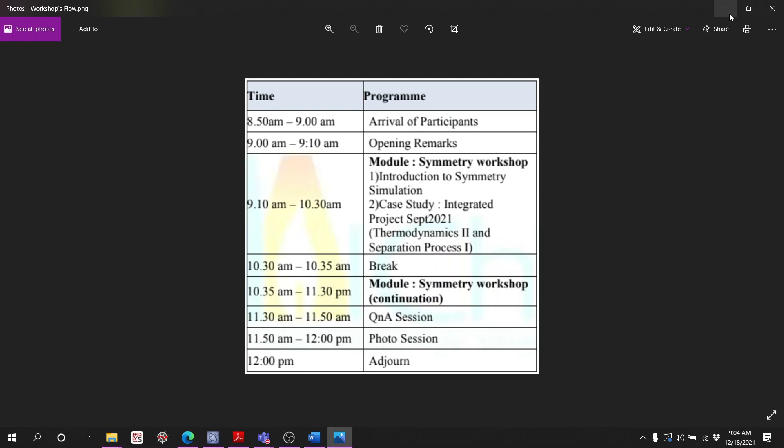But the main question in this business is what to do, right? So what do you want to do, and then how to do that. And then where we get the information to do what we want to do. So that's basically what is more important, rather than only following blindly what I'm doing. So I need to have your

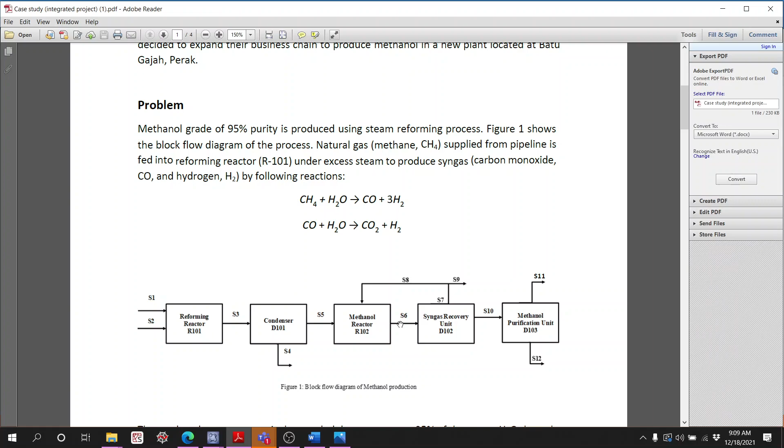And then the produced syngas is cooled down. So we have the syngas produced over here. In this reactor, running these two reactions, it will then produce syngas, and it will be cooled down to remove 95% of the excess water.

So this is the excess water. We need to remove 95% of the excess water, so there's about 5% of water coming out. If we assume 100% water coming in, 95% will be dropped to remove 95% of the excess, because 100% here is the excess water.

So we will do this step by step.

My first question to you: in running this reaction, you need to know the operating conditions. So what are the operating conditions of this reactor? What is the pressure and temperature?

Anybody? Like I said, if you don't have the answer, then we cannot move forward. Okay, now find the answer, you can just Google that or open your book, whatever.

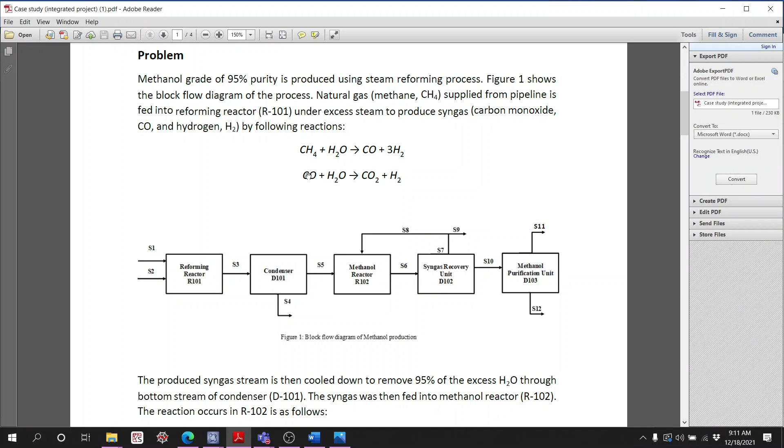Let's put the components first. So we need to have methane, water, CO, CO2, hydrogen. So it's these four, and then we need to have methanol, because in the end methanol is then going to be produced here.

I'll put this aside to my other screen. We need to go to the compounds first, and then here you can just type it. C1 is then methane. So when you type C1, this list shows everything that has to do with C1. This is then C10. So this is then methane.

So you can either click this, and it's added there, or you could also do, for example, water, and enter once, it will be selected, and enter the second time, you get the component in. And then you could also do multiple components all together.

So we have methane, water, and now CO, carbon monoxide, and then you do a semicolon, so this CO is captured already, and then hydrogen, and another semicolon. Now you have captured CO and hydrogen, and then we need to have CO2, and then we need methanol. So now you have captured four, and press enter, and enter once more.

Right, and then in all of these other reactions, we have CO, hydrogen, methanol, water, it's there. So all of these components are in our system already: methane, water, CO, hydrogen, CO2, methanol.

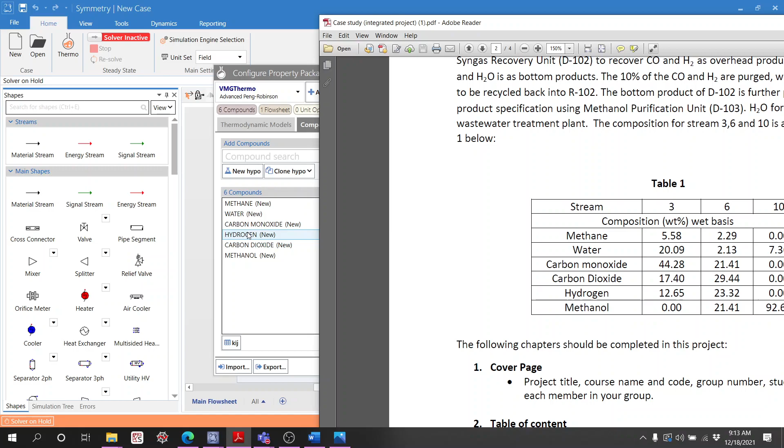So you could also rearrange it, put hydrogen below CO2. How we do that is we go by sort, click sort, and we need to drop this down, move down, and have it the same as in this stream table here, for example, and then apply sort order. Okay, now, can you follow?

Can you follow? Yes or no? Again, like I said, yeah, I need to have...

Okay, now thermodynamic models. We could use various different thermodynamic models. For example, we can use one model for this block, another model for that block, and another for that block. You can have as many thermodynamic models as you want, because in specific unit operations there is only one thermodynamic model that fits the best. So you could do that, or we can just lump them all together like normal people do.

They just use one thermodynamic model. Hopefully they will just use one thermodynamic model and capture the entire vapor liquid equilibrium or the entire thermodynamic properties, because all of these are working at different operating pressure and temperature.

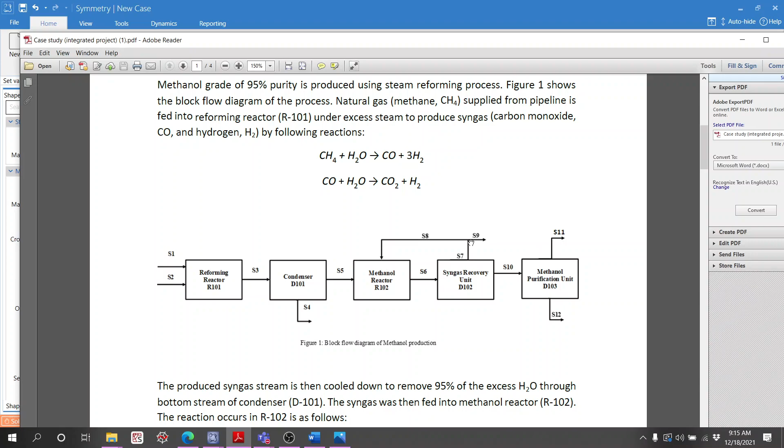So in this case, we could use simple, or let's just try this and see, because sometimes we don't have a license for all of these thermodynamic models. I don't know if you have the license, because your license is different than mine. So let's see, if I click done and there is no error, that means I can use this. But if there is an error, that means I cannot use this. I click done, see, I don't receive any error, that means I can use that thermodynamic model.

So now, when you click that done, do you see any problem? Do you see any error? And can you follow? Hello?

You can just type in, yeah, if you are too shy, you can just type in. You can just put like a thumbs up or error, error.

So that means you don't have the thermodynamic model, so we have to change it to a different one. Go to thermodynamic model and then use the ones that for sure they have, or you have it, which is this one.

So this advanced Peng Robinson is not the original Peng Robinson. VMG already adjusted this so that it fits for natural gas, refinery, and petrochemical. So you can click that and then click done. One more thing, and I hope there is no error, but if there is, let me know.

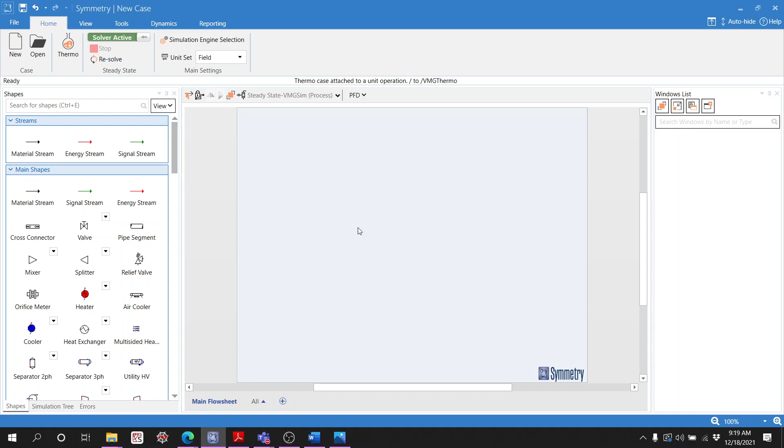Okay, so now we are here. I will show you. We have specified the thermodynamic model, the advanced Peng-Robinson, and then we have specified the six components. Up until here, this is the only thing that you need to know. There are many things behind this, but we will leave it to the advanced user later on.

Now we need to create streams. We need to create two streams: one is methane, the other one is water. So what we need to do is...

This symmetry works with Visio, and I think you're all familiar with Visio. So it's just like a drag and drop, simple like HYSYS as well, because the very people who developed HYSYS back in the 80s are the same people who became the advisor of developing this symmetry. So if you know HYSYS already, you know how to use symmetry. But I don't know how well you know either HYSYS or symmetry.

Nonetheless, it's just like a drag and drop, I can just click and then drag and drop, and then double click on this. So for example, instead of S1, I just use the methane stream. So you can have like a methane feed. You can just rename it to whatever you want. So, methane feed.

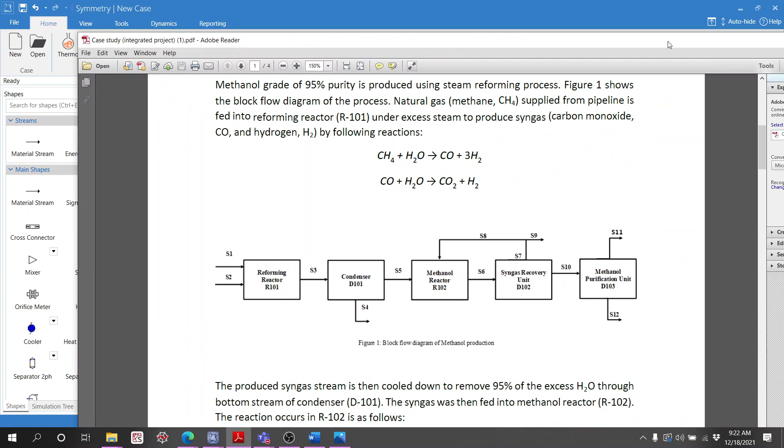Before we go to that, it says here natural gas is supplied from pipeline, and then we have steam as well. And then these two, when they come to this reforming reactor, the conditions of these two streams have to already be at the conditions required by the reforming reactor. I repeat, these two streams, when they get into this reforming reactor, their conditions have to be at the same conditions required by the reforming reactor.

And hence, if it says it is supplied by a pipeline, that means it's like a typical ambient temperature, and I don't know what the pressure is, could be like 50, 60 bar or something. And then the steam as well, if it's like a high pressure steam, like 40 bars or so, 300 degrees C or something. And then when it gets to this reforming reactor, which you should know, and which you will tell me now, we need to do something with this such that these two conditions meet the reforming reactor's conditions. Okay, now...

Write down in the chat what the operating conditions of this steam reforming are. So now we assume this methane feed is coming from a pipeline, right? That means it's ambient temperature, I don't know, 25, 30 degrees C, and then pressure, let's make it like, I don't know, 50 bars or something.

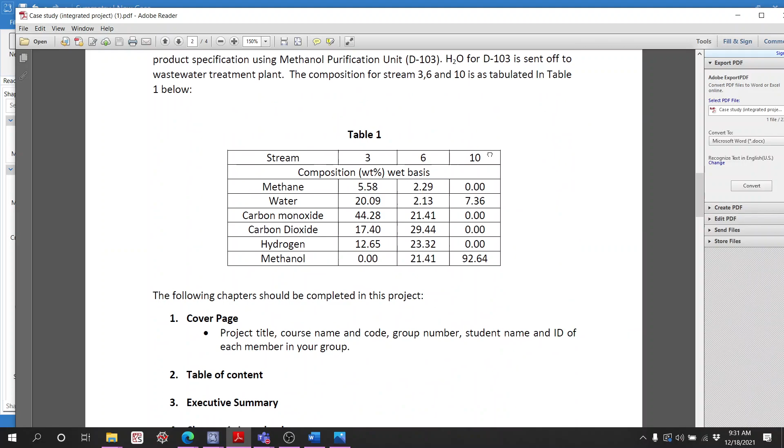So in this case, we can just say 50 bar, and since we don't know, what is that document again? We don't know how much is coming in, and it doesn't say how much methanol you need to produce. Okay, so it's something for you to figure out. In this case, maybe 1 ton an hour, so 1,000 kilogram per hour. So when everything is filled in, you can see this remark as solved. That means it can calculate the molar flow rate, volumetric flow rate, and so on.

We can click this drop down. So you have energy, enthalpy, entropy. It's all relative. It has a baseline temperature for enthalpy and entropy behind this Symmetry. Molecular mass 16, density at this temperature and pressure, compressibility, and so on. So it is there. It's green, solved, and you can see that this is light blue. In my version of Symmetry, light blue is vapor.

And now we make another one, steam. Do you have any questions so far? Can you follow? And then what are the operating conditions of the reformer? Nobody knows. If nobody knows, then I don't know what to say.

So now the steam. We can just say steam feed or feed steam. You can put any name as long as you can recall it later on. So what do we say on this steam? Because I don't know what is needed, we'll just assume something. So 300 degrees C. And in this case I can play around, because this is steam. So we put one in water, and then we'll see. Now, if you say that it's 1 atm,

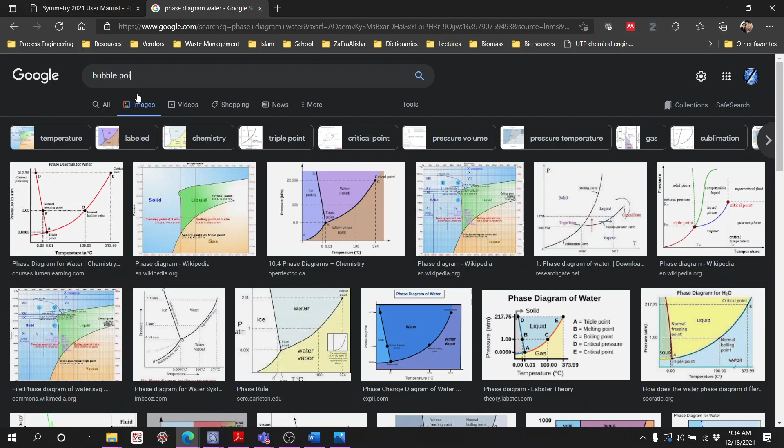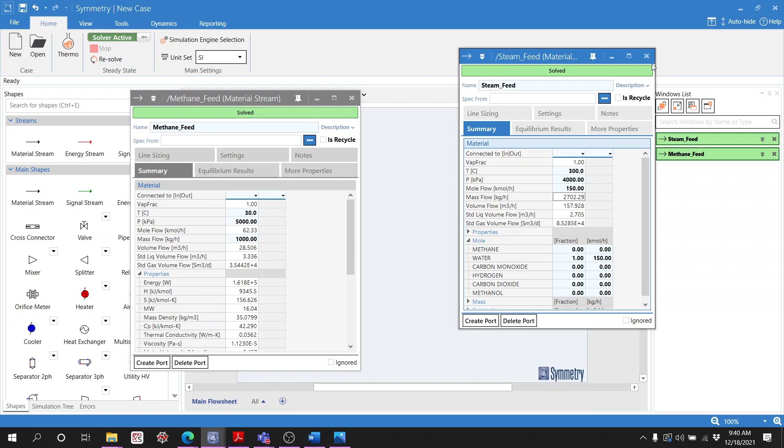So that means this is then the 62. That means I can safely put here like 120, for example, or 150. Let's put 150 kilomole an hour. So I have that 150 kilomole an hour. It's 2,700 kilogram an hour. Okay. Now we can just save this. Make sure you always save this. Save it by any name you like. I save it as methanol from steam methane reforming, so that I know what's in it.

Is there any question? It's 40 minutes. I've been talking for 40 minutes already, so I will stop here. Are there any questions? Hello, hello. Can you follow? Is it too fast? How do I know whether I am too fast or too slow, whether you understand it or not, if you don't make any noise? No questions. Okay, very good. You have to be more interactive. The kids nowadays can express themselves better in TikTok, in Twitter, in Instagram or whatnot, and you have to be able to translate those expressions of yourself into the classroom, into a workplace environment. Because if you stay quiet, people do whatever they like on you.

Okay, now if you don't have any questions, now I'm questioning you. What are the operating conditions of the reactor? Because this feed needs to be conditioned in such a way that it can fulfill the reactor conditions. So what are the operating conditions of that reformer? Come on, I give you 2 minutes. What is the pressure and temperature of that reformer?

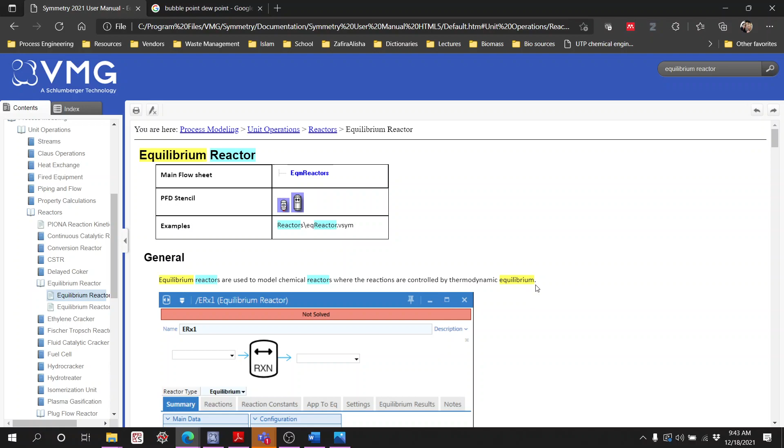Equilibrium reactor. You can Google equilibrium reactor: controlled by thermodynamic equilibrium. And then there's also this Gibbs reactor. In this reactor, we don't specify the reactions, we just specify the components that are possibly coming out of the reactor. It then uses Gibbs energy minimization calculations to calculate the product. This reformer typically works at higher temperature and lower pressure, so it's very close to ideal, and it gets to equilibrium already.

Okay. Hey, where are the reformer operating conditions? Come on. If you don't have it, you can just sit here until 12 o'clock. Because I don't know that information and you don't know that information, so what do we do? What are the operating conditions of the reactor? If you don't know, we cannot move forward. Hello. Steam methane reformer. Very easy. What happens with you? 20 bar, 250, 360 degrees C. So how do you get that?

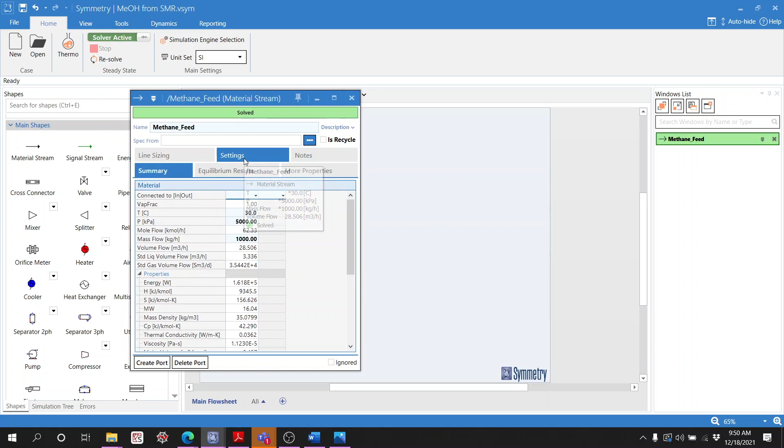So in Symmetry you can also find it here, a port. I think port is somewhere here. Symmetry fundamentals. Port. Yeah, somewhere here. You can just search for this later. Fundamental concept, port. So you can read this later on. But I'll just quickly tell you. Okay. Where's that thingy?

If you click drop down here, methane dot out. That means this stream, methane dot out, is here at the end, because it does the calculations and it will then send the results of the calculations to this output, and this part is the inlet. This is the inlet, and this is the output. So that's why this unit has the inlet over here, and then the output. So the input of the valve has to be connected to the output of something else.

So in this case, methane feed. So it's there. So we have in and out. In is over here, out is over there. So in is then over here.

So we just need to reduce the pressure, right? So you could do it many ways. Number one, because it's 50 to 20, that means you have to reduce by 30 bar. So you could use 30 over here, or you can just simply put 20 there, and then let Symmetry calculate that for you.

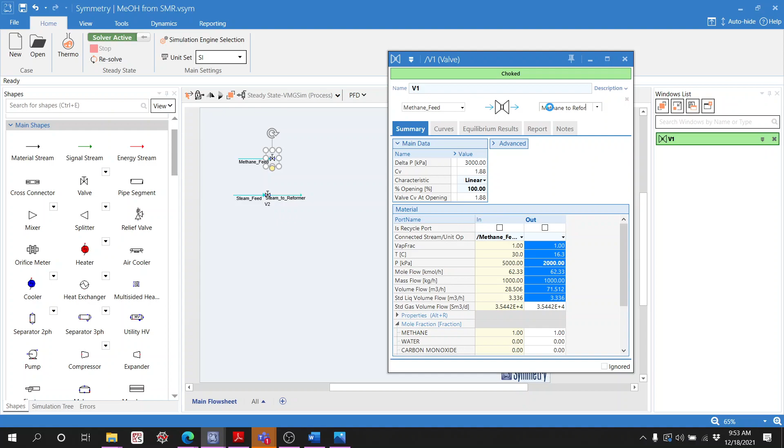For example, the same goes here. The conditions are there, but the name is not there, because this unit is not connected to any stream. So you can either drag and drop and rename it, and that's another hassle. So we can just easily write this down. Methane to reformer. Okay. Any questions so far?

Yeah, because this is like Visio. So you can zoom in with control and scroll up, zoom out with control and scroll down, and then shift left, shift right, control up, control down. Something like that. So it's easy.

You can also, if I want to extend this, just like Visio, use control. You can see control. See? Control, and then you go to the right, and then you can just drag, so then you have a bigger flowsheet.

Valve and relief valve. A relief valve is also a valve, but it is named relief valve because it has only one function basically. This relief valve is only to relieve what's in it. So for example, I'll show you the easiest way to learn, so that you can do this on your own later on if you don't know. Again, googling skill is the best and most important skill nowadays.

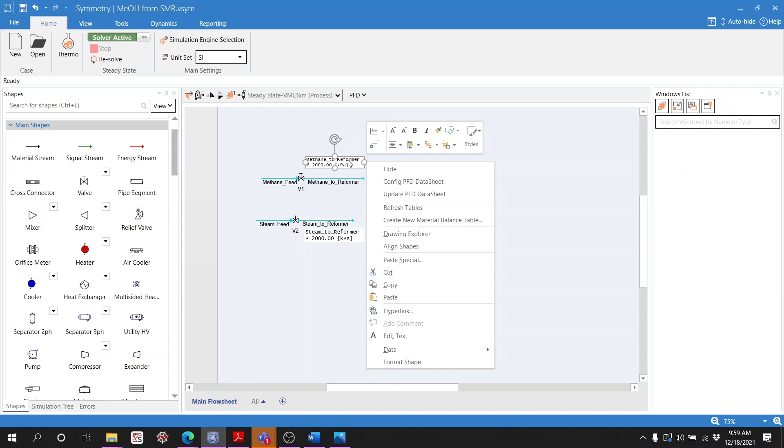Okay, so because someone wants to have a bar, I want to have 20 bar, why are you showing me 2000 kilopascal? So just right click here, right click, and then config PFD datasheet. Right click and then config, and then hopefully it will appear. It'll take some time in my case, but I don't know why.

So in the meantime, while waiting, you can just change the unit to bar, for example, bar. Okay, and then the format you can just say I don't want to have decimals, I want zero decimals. And then to apply, that means if you click update, only this one will be updated, but if you apply it, this will be applied as well. So apply to all material streams. So you can see 20 bar, 20 bar.

And then we mix it and then we heat it, it's easier than heating them all separately. Mix it, so mixer, and you can also do it this way, and you can also do it that way to make it easy. So when you connect it, you can see that this is already dark, so it means it is solved already.

Solved already, and then 20 bar, 20 bar, 20 bar. So lowest P outlet is the default calculation mode. So if 20, 20 coming in, outlet should be 20. If it is 40, 20, that means the outlet should be 20. It accommodates the lowest pressure in the inlet, because otherwise it won't flow.

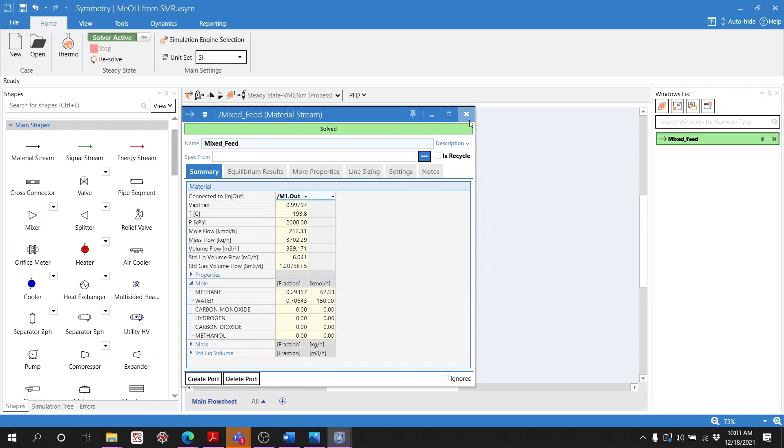And then you can just drop down and feed to the reactor, to the reformer, feed to reformer.

Now, in this heat exchanger or heater, whatever you want to call it, the goal of this unit is to increase the temperature. The goal of this unit is to reduce the pressure, and the goal of this unit is to increase the temperature. The goal of this unit is to mix the streams. So since the goal of this unit is to increase the temperature, we need to know what the required temperature is. What is the outlet temperature?

You can do this in many ways. You can add a delta temperature, so this plus a number plus this number, you will get that one. Or you can just type in your number here or there. In this case, if we type in 900 degrees C, that means the delta T is then 700 degrees C. And then it doesn't converge.

It's not solved automatically because it still needs the pressure balance. The energy balance is there, so we have the energy. The mass flow rate is the same. But the volumetric flow rate is not there because we don't know what the pressure is.

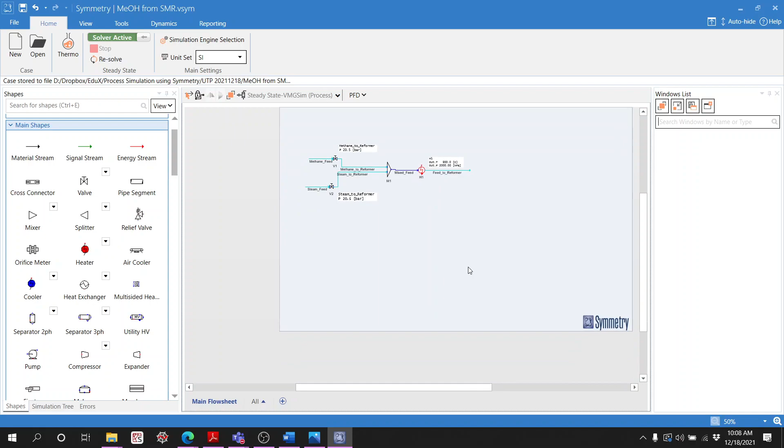Later, sorry. How to share? Do you have this flow sheet? Yes, I have this flow sheet.

Okay, I'm trying to share my screen first. You can just share your screen. Sir, can you see my screen now? Yeah, very good, one minute. It disappears, it's gone. Now cannot, no, it's gone. It's black, I don't know about the others. Oh, like this, and now, one minute, now it's good. Okay, so what's the question?

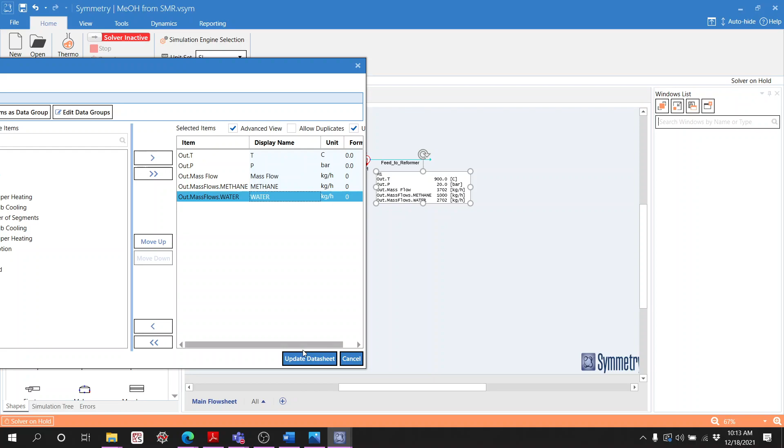I think you can also rename this display name—so by default it takes out this, but if you don't want to see this out stuff, why do I want to see that? I don't want to see that, for example, yeah, methane and water, and then update, and you get this, and then save—don't forget to save always.

Okay, thank you sir. You're welcome. Very good, yeah, very good. So we need people like you more—you need to ask questions, sir.

So you cannot see my screen already right now? I can see your screen. Yeah, I saw your screen. You still saw my screen. No, this is my screen. Oh okay, yeah, okay, because I didn't stop sharing just now. I'm just wondering whether someone needs to stop—no, you don't need to stop. If someone shares his or her screen, the previous one will be overlapped, or replaced, closed.

Okay, now feed to reformer. So we know that we have fulfilled the required conditions for temperature and pressure, and now we go to the reactor. Since we don't know, we're not using any of these fancy reactors, we simply use a conversion reactor. Or we could—I think we will just try both, equilibrium and conversion, so we'll see what the difference is.

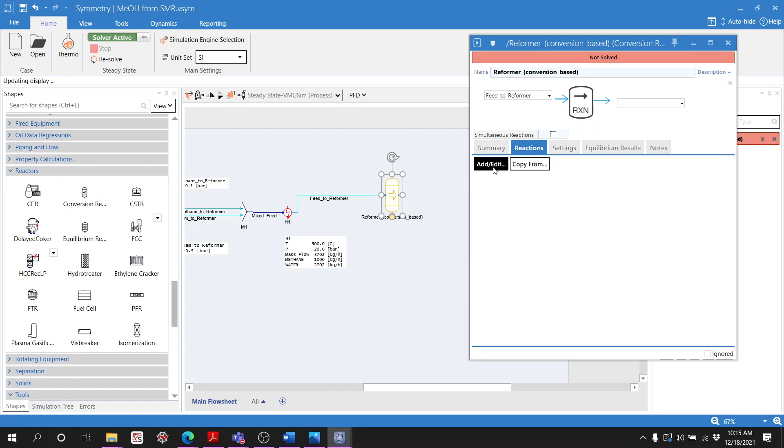And then we need to specify the reactions because this is conversion based. So specify the reactions. Go to reactions, and then here we can click add or edit. So you can name it, reaction one, for example, and then the base component. So you can see methane is reacting with water. In this case, I think it is more appropriate to use methane as a base component. That means we will do the calculation based on methane, not on water.

And then in the second reaction, we will do the calculations based on the CO, not on water. This water will be left hanging, so it will be calculated accordingly. So methane as a base component for this first reaction, and then CO will be the base component for the second reaction. So we can see base component is methane.

Now the reaction, I think you know already if you know how to use it. So this is going to be -1, this is -1, this is 1, this is +3: -1, -1, +1, +3 from the stoichiometry. So methane is -1, so I just type in -1. Water is -1 as well, and then carbon monoxide is 1. You can also see while I'm typing here the balance in moles. This has to be 0, otherwise something is wrong.

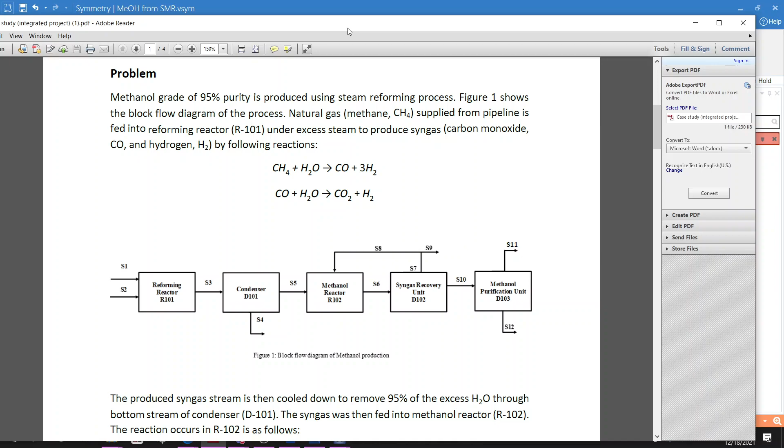And then the CO, because we need to have more CO, we could say maybe 10% or 20% CO is being reacted over here. So it's something that you need to find in the literature: what is the typical steam methane reforming outlet here? So just put a number, like 20% or something, and then click OK. Okay, and then the summary.

In this case, we need to know the pressure. We have defined the pressure. There is a 50 kilopascal pressure drop. Because this is conversion based, we do whatever we like here. We need to declare this reactor. Is this an isothermal reactor or adiabatic reactor? If it's isothermal, that means the temperature stays constant throughout the reactor, or it's adiabatic, that means there is no energy coming in and out of the system.

Again, I repeat, we need to define or declare whether this reactor is operating in an adiabatic manner, that means no energy coming in or out of the reactor, or is this reactor behaving in an isothermal way, that means the temperature is kept constant throughout the reactor. So how to know this?

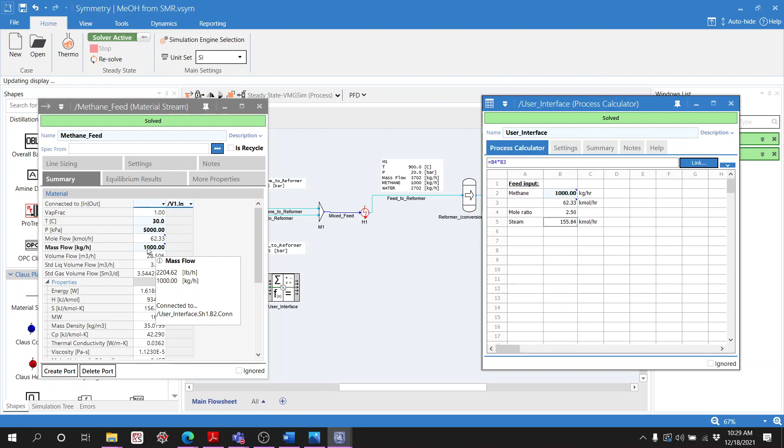So bold is something that you key in. This is our input, like this one. But if this is not bold, like 62 and 62, it's something that is being calculated. Bold is input, not bold is calculated. In this case, this is also our input, but only in the process calculator, so it doesn't have bold. If you want to make it consistent, you can just click Control B and it's bold, so that you know later on, next week or tomorrow.

And then the steam. We use this steam as an input, 150. But in our case, if you put the mole ratio of 2.5, it has to be 155. So we can right click here, copy connections, highlight this and then paste connections there. So you have 155. This 155 is no longer an input in this window, but it is an input somewhere here, which is controlled by this guy. Okay.

By doing so, you see that we have two connections here: one connection to this methane, and another to this steam. That's why we have two green lines. But later on, it will get messy, so I typically hide PFD connections, so there's no green line. I put this aside, because we need to know this up until here before we move on to this user interface. Do you have any questions?

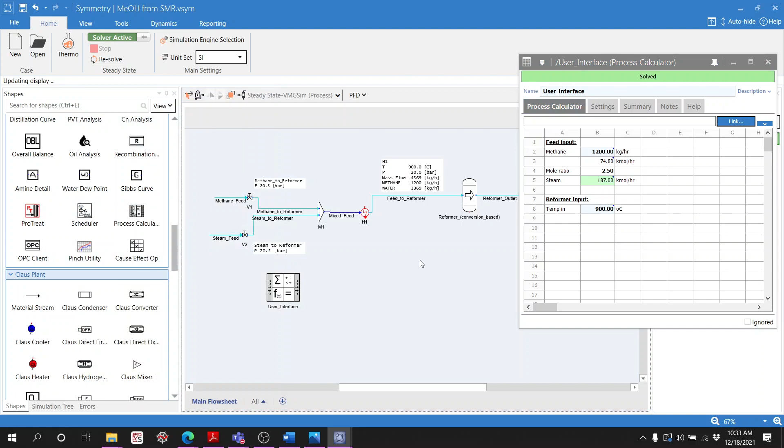So in this case, reformer input is obviously the temperature into the reformer, which is this here. Temperature into the reformer, copy connections, and then there, and then in the reformer itself we have the reformer conversion base.

Reaction 1, reaction 2, you know, 1 and 2. This is 0 and 1, because it's based on Python. This is in fractions, from 0 to 1, but we know this is the 99.9%. So we copy connections, put it there. This is also copy connections, and then put it there. So that's it. Save.

And then you get up until here. These are the important inputs that we can play around with. Okay. And then, as I promised, we'll try another type of reactor, the equilibrium reactor. See what happens. So this equilibrium reactor will use the same stream, same input basically.

So how to do that? This is the power of this simulator. This can be easily done if you click on this, open this stream. We can just easily click create port. That means we create port from here. So what do you want to copy? The inlet, the outlet, or any other properties.

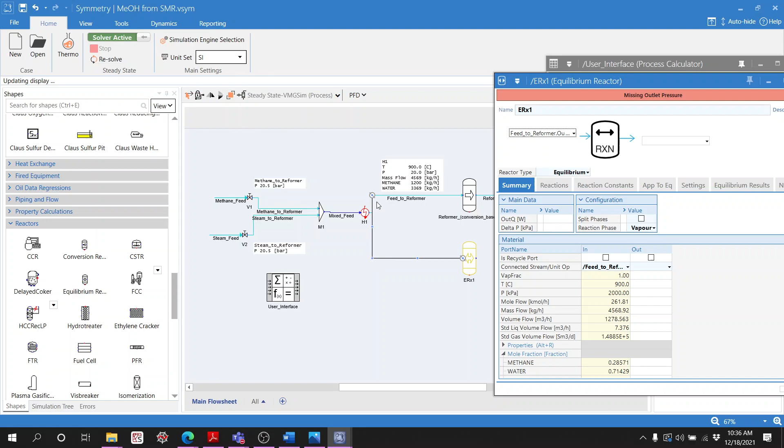So we can just keep it open, and then we double click, because there is an out-1 stream coming from here. We just don't see it. So the way to do that is double click here, and then enter here, and just drop down. You can see out feed to reformer, which is this, and then out-1, which is this guy, coming from the stream into the equilibrium reactor.

Again, delta P we keep at 50, and then temperature is also... okay, now it's a bit trickier, just to make things the same. So this cell, we are going to use the same temperature here, constant, the same temperature there, constant. But this cell, it is connected to this temperature. Sorry, it's not connected to that temperature. It's not connected anywhere else. Basically, there's an input temperature.

So temperature of conversions, so this is then this guy. Copy. Oh, I cannot copy this. See, I cannot copy this. So the only way to get that here, I can just use this in the reformer outlet. Instead of keying the temperature here, I can just key the same temperature there, at the outlet. So I will just delete this and then put the temperature here. So this guy is taken from that, and that one we can copy easily.

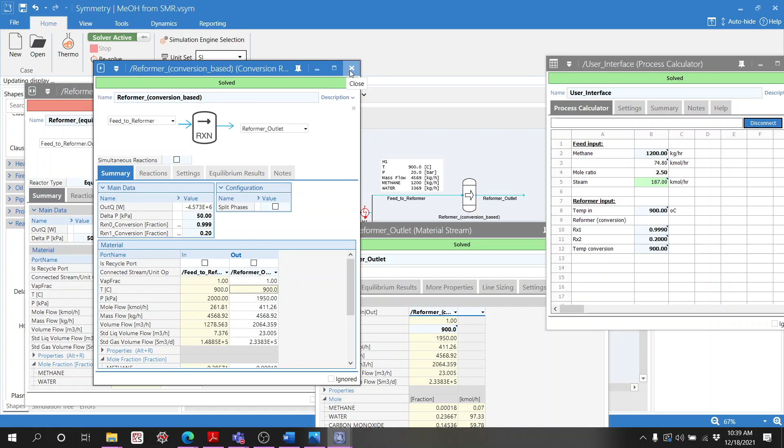So now, since the temperature of conversion is over here, it is connected to there. So I need to make a temp reformer equilibrium. Temperature equilibrium. So in this case, we are going to use the same temperature. Let's use this. Enter. And then again, I don't think we can just copy paste this. Copy. We cannot paste this, because there's something there.

So what we could do is then reformer outlet equilibrium. So instead we use the same trick. We copy this, copy connections. We put it there. Paste connections. Okay. So both of these reactors are using the same temperature. And then now the reactions, we can just edit or copy from. Let's see if we can copy from. This one is the only reactor. Select all, and then okay.

So I have these two reactors, equilibrium, and then this one is also a constant. This is something that we need to have, which apparently we don't have, unfortunately. I forgot that we need to have this. So we need to make a table of temperature and experimental K. Because equilibrium depends on the temperature, we need to have the data on the temperature and the equilibrium itself. If not, it will not know. So in this case, we cannot proceed with this equilibrium.

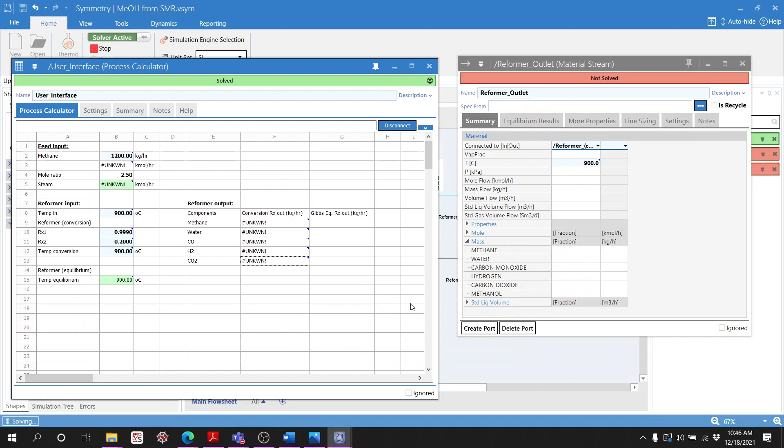Okay. Now the same goes with this guy. Copy methane, and then water, and then CO, and then hydrogen. This is a bit, yeah. So now save. Don't forget to save.

We can see apart from methane, one is then 10 times bigger. Water is about the same. CO is slightly lower. Hydrogen is slightly lower. So all in all, it's not that bad. Yeah, I mean this whole stuff is not that bad. I mean these assumptions that we make in comparison with the Gibbs calculations is not that far off, except for this methane.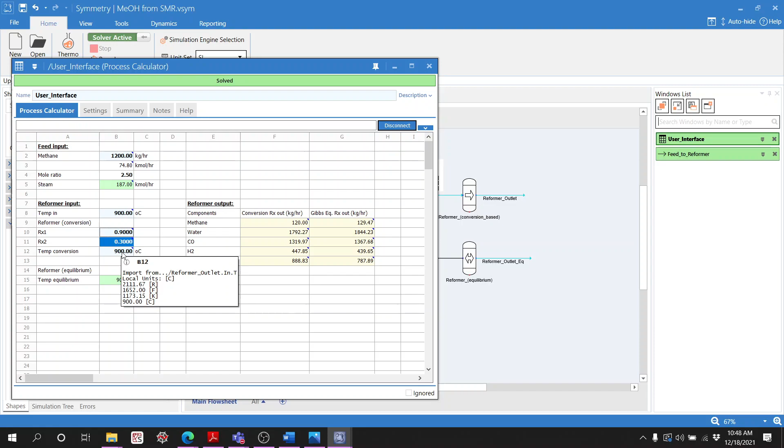Leo, why do you want to control this?

Okay. So now I'm giving you another tool as well, to do this calculation automatically. Because we know the methane is in the first reaction, CO is then the second reaction. So we want to make sure that the difference between this and that is very small. What we just did was trial and error manually. So I want to show you how not to do that manually.

You can just make a square of error. So this is then this minus that and then square. The square of error is then the 89. So I want to minimize this. If this is minimized, this number will be approximately the same. And I want to know the conversion that corresponds to this minimum number. So how to do that?

We use controller. See this controller. Double click. You can play around and apply the same concept in other situations. I want to make sure this becomes 0. So this is our PV, the target variable. It says PV because in dynamic simulation you will use the same controller as well. Right click, copy connections, then right click, paste connections. You get this 89. And the target is 0.

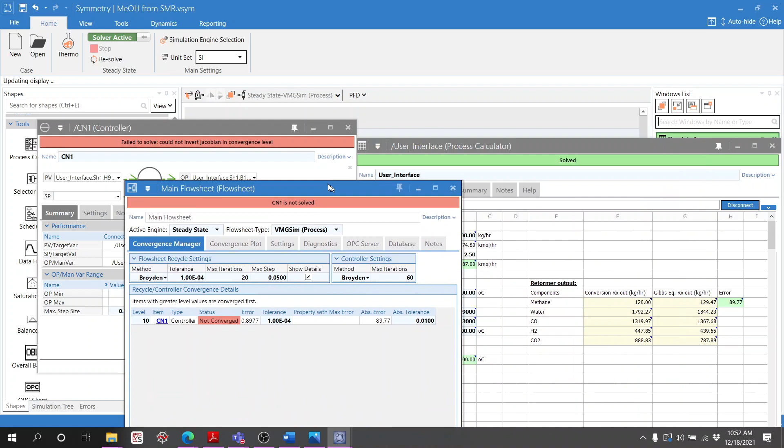Okay, I'll look into this later and update you on why we cannot do so. I think there's something to do with the... I'll let you know once I get this done. But this is basically the way we do this adjustment or controller stuff. I don't know why it doesn't work. This one, I don't know. It typically works.

0.9. Could not invert, yeah, I don't know. I don't understand this message. Anyhow, I'll put this inactive, so we'll skip this. I will let you know later. I'll check into this, what happens.

Nonetheless, we are now here at the outlet of the reformer. So we have done save. What we have done is, see, it's already close to 2 hours, and we are only until here. Okay, we're only until here. Now this stream S3 is the outlet of the reactor, and it will then be condensed to remove 95% of the excess water.

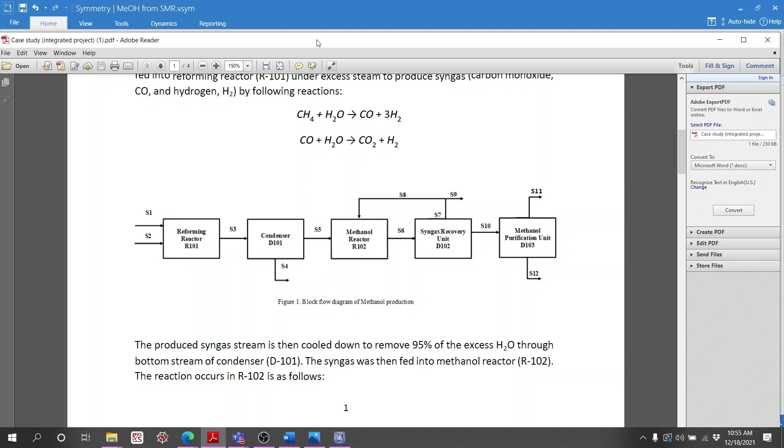This is cooled down, yeah. It's cooled down, not like a scrub or a quench. So it says cooled down here, meaning we just need to reduce the temperature in this case. So we are going to reduce the temperature from 900 to a temperature that can condense 95% of the water from what is coming in.

Mathematically, yeah. To be honest, I don't know how to do this practically. You can then lower this. We typically use a quenching, but in this case no. We can just mathematically reduce this temperature, cool it down, and work on this Gibbs free energy.

Okay, so we have a condenser. This condenser basically has two functions. Number one, reduce the temperature, and the second function is that because you reduce temperature, the water vapor will then have to condense, right? So once it's condensed, we then have to separate that into vapor and liquid. So the first function is to drop the temperature from 900 degrees C to a certain degree C, and after that it will separate the vapor and liquids. So two functions.

So in this case, I repeat, we are going to need two functions. Number one, reduce the temperature, and number two, separate the vapor and liquid. So from that perspective, we need two unit operations. Number one is the cooler, which we need to reduce the temperature.

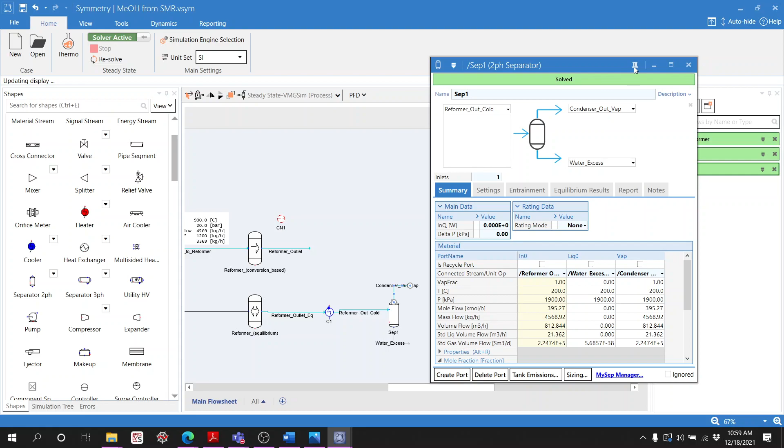And then we see nothing. We can see so liquid is zero, all zero, and everything is still in vapor. And then you can also see the color - this is all gray. Gray means there is no flow. So what is coming in here, everything is still in vapor.

So what we could do is make a calculator. We need to have this 95%, right? Just, I don't know why, but let's for the sake of it take it as it is.

Condenser. Water in - so water in is the one that is coming from the reactor outlet, right? So this water in is then the amount of water at inlet. So that number, copy connection, the outlet of the reformer, and we put it there. Okay, kilogram an hour.

And then 95% in the liquid, right? In the liquid water, it should be 95%, right? 95%. So how much is that 95%? That is then this guy times that guy.

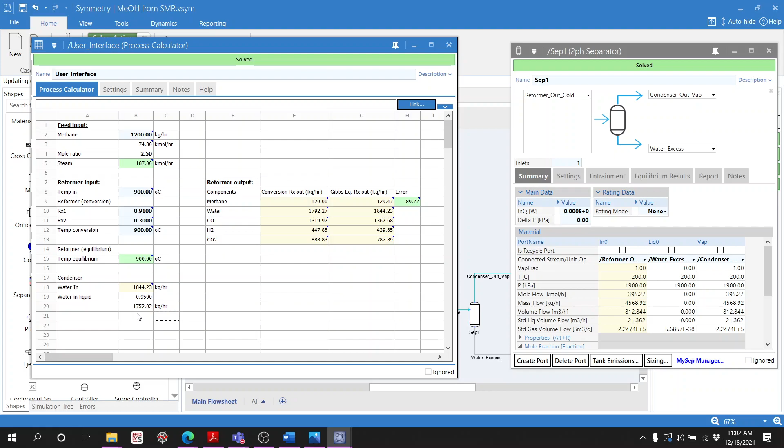Basically in this water excess, right? This has to be in the water excess. It has to be somewhere here. So what we could do is play around with the temperature, reduce it in such a way that this is then the water, the water excess over here.

The water excess over here with that stuff is this stuff, right? This is the target. So this target has to be close to this number, close to this number. Okay, so how to do that?

We use the same controller. So this is what we want. Target: we want to have it 1700.

750. And then what we can control, what we manipulate, is this guy, this temperature out. Okay, step size is, I don't know, 100.

Error, blah blah blah, so it doesn't do anything. It tries to do something, but apparently it doesn't do anything. So if we try it, however we call it, it doesn't do what we want.

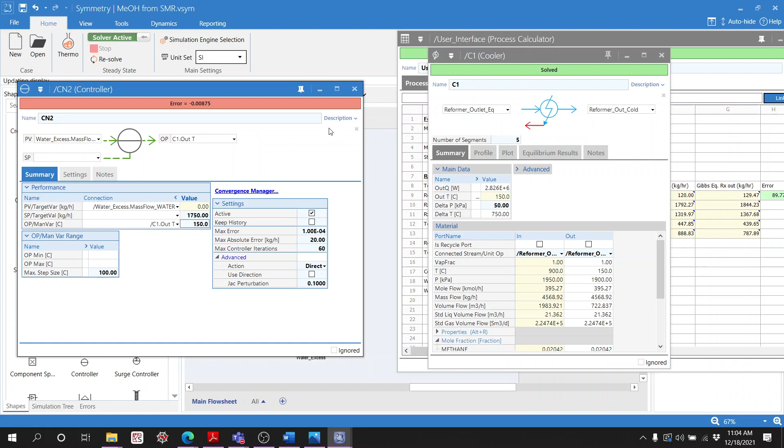That's not necessary. So if we reduce this manually to 150, it doesn't do anything. So what can we do further? Because we don't know what the temperature is, we don't know what this temperature is.

We could use one of the tools, which is the case study. This case study is more like a sensitivity analysis. We can vary the temperature here in such a way that we monitor how much is then the water excess. So that's what we could do.

Case study, we can rename this as condenser. We need to make it... we need to disconnect it from anything. Sorry. So we vary the temperature.

Not copy connections, but then add to case study. See, add to case study. So we have to get this window open. If this window is not open, if we right click here, there is no add to case study option, so it has to be open. This window has to be open.

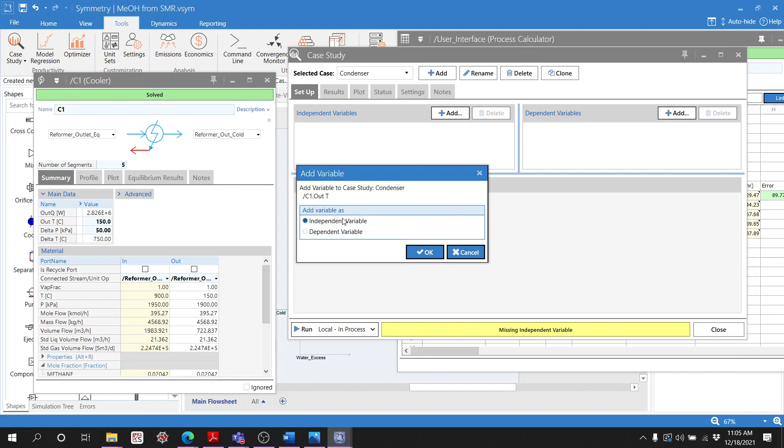Okay, condenser. And then we add to case study condenser, and it is then the independent variable. It is independent variable because it's something that we vary, something that's our input. So we vary that.

And then the outlet is what we want to see, which is the water excess. So this one we close, water excess. I want to see how much water. So we add as the dependent variable, because it is calculated.

So we are varying this from minimum and maximum. Maximum is 200 degrees C, because we've done that at 200 degrees C. Minimum could be like, I don't know, maybe 50 degrees C or something. How many points? 11 points, and then you can just go up.

So 11 points: 50, 65, 80, and so on and so forth. You can just change it to 10, for example, or 20. Or you could also say, I don't want to see these points, I want to see delta 10 degrees C, for example, and then it's 16 points.

And then it says ready, so you know what you vary, which is the outlet temperature here, and you know what you monitor, what you want to know. Then we click local. In this case, we run local in process, meaning one core, or you can also run in multiple cores. That will take much more effort but be much faster. So up to you, it doesn't really matter.

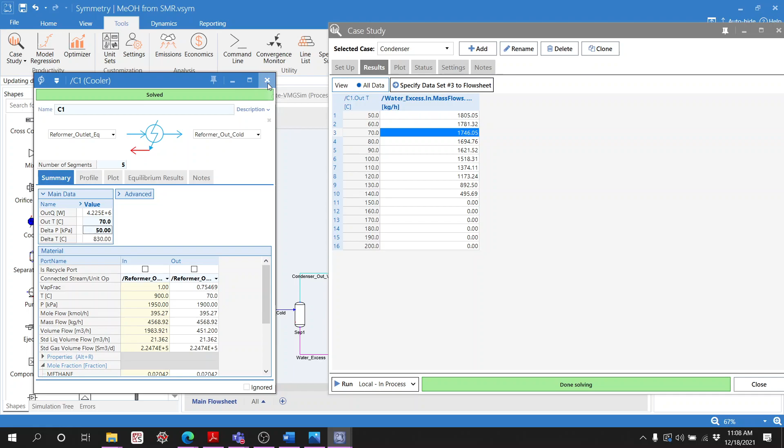So temperature on the x-axis, water on the y-axis. We need to have something like 70 degrees C, so somewhere here. We can then use 70 degrees C or 60 degrees C as the initial point. Once you know this, this is 70 degrees C for example, so you can have, now you are condensing 95%, and then we do this.

Let's do this here. I'm curious why this controller is not working. This is what we manipulate. Copy connections, right? Here.

This is then now, this guy, copy connections to that one, and we want it to be 750, 1750, 1752 for example, and then the step size is 100.

Yeah, the error between this and that is already lower than this guy. If I reduce this to 5, okay.

Anyhow, let's do this, 100. Yeah, so why is this not running? This is a great result. It's not running. So it's not updating.

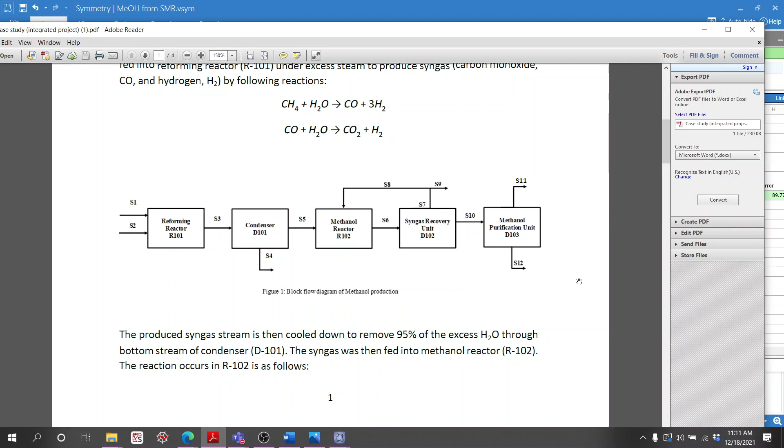Any other questions? Do you have any questions? Can you follow? Yeah, I don't know, I think I've spoken too fast. But since you don't make any interruptions, it seems that you can follow me very well. So I highly appreciate you for that.

So let me know whether you can follow me very well or not. Any questions? Or is this too much already? Or do you need a break? Because I can work this out without any break here. Let me know. So...

Now you need to know we are now here, not there. We are now here at the outlet of the condenser. And then this syngas needs to go to this methanol reactor. So I'm asking you now the same question as in the reforming reactor: what are the required operating conditions for the methanol reactor, for the methanol to be produced? I'm giving you 2 minutes to get me that answer.

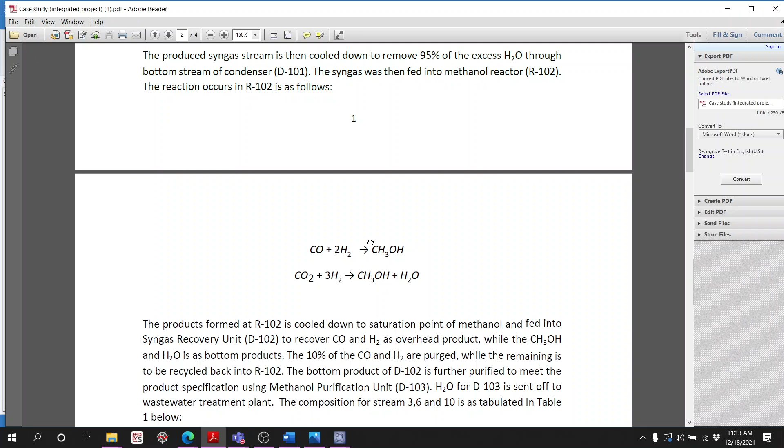In the meantime, you can also ask me anything. Hello. Hello, hello. I don't know if you were there, or if I've been speaking by myself for the last hour, that one I don't know. Hello, hello, hello. No? Shall we continue this or no?

Done. So the methanol reactor is more like a fixed bed reactor, really like a PFR type of reactor. If we have the kinetics, we can use the PFR type of reactor, but if we don't, we can just assume the conversions like what we have assumed before. So it depends on the information that you have. You can either give me the operating conditions as well as the conversions, or you can give me the operating conditions as well as the kinetics of this methanol reaction. So it's all up to you, because in the end you have to go to the field and find all of this information. Otherwise you'll get fired, huh, and you can go do something else other than chemical engineering.

Now, any questions? Hello, is there anyone else? If there is no one else, then we can just close this meeting. Hello, hello, hello. No? Yes, okay sir. Are you there, or are you sleeping, or are you doing something else? Because that is then the limitation of this online class, right? So in an online class, I don't know what you're doing. Shall we continue or no?

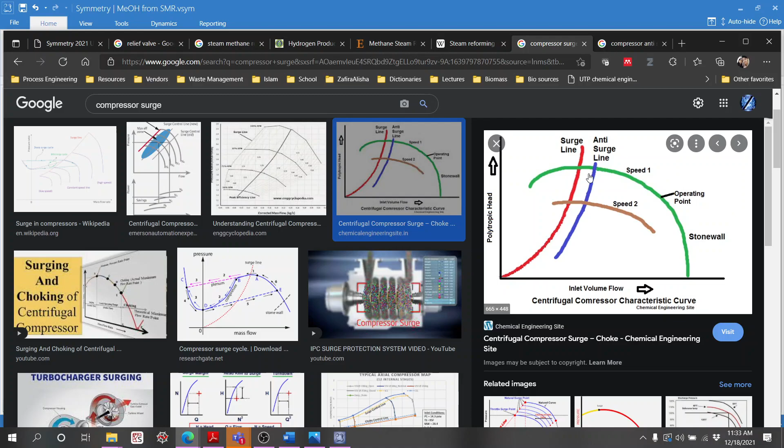Oh yes, we could do that in HYSYS. We could also do the same thing in Symmetry. It's the same, as long as you model this system. You have a vessel with its capacity, the lines with their capacity, and a compressor with its performance curve, so you need to get this graph from the compressor vendor. Then you have the cooler, and this valve, and this valve. It's all in dynamic simulation.

I don't think we will go through this in this half an hour. Dynamic simulation will take another day in itself, because I need to explain what dynamic simulation is, how we can do dynamic simulations, with some examples, and then we go to surge. But to help you a little bit, I think we have it here.

So if you go to Symmetry, you go to program files, then VMG, Symmetry, and then the documentation, I guess. You have manual examples, plant examples. Plant examples, for example, you have a flare and relief system, maybe. No. Manual example, vapor storage, piping and flow, compressor.

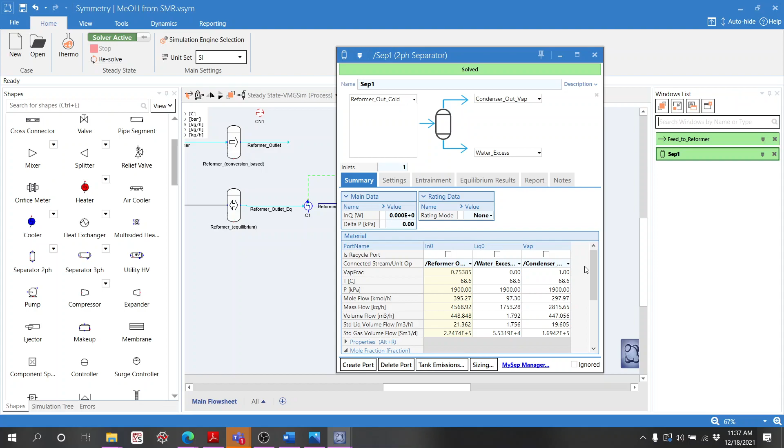It's also a good practice for you, because you said that you have the HYSYS simulation model in dynamic, and you can copy that same input to Symmetry. I will show you later on. Maybe just discuss with your teammates, and then we can have another separate session on that. Just let me know.

From now on, we need to continue and then stop at 12. Like I said in the beginning, we were not going to be able to complete this, because you don't have the information. So every time I ask you the questions, you cannot answer me. So now my question to you again, for a few times already: what are the operating conditions for this methanol reactor? Because without knowing this, just like in the reformer, we are stuck here.

Yeah, excellent, Zahran. So it's a methanol reactor, so it needs to be around 250 degrees C and 100 bar something. And this is the one that goes to that reactor. So we have now 68 degrees C, and only like 19 bar, right? So what to do? That means we have to increase the temperature, and we also have to increase the pressure.

But which one to do first? Zahra and others, which one to do first? Shall we increase the temperature first, or shall we increase the pressure first? What to do?

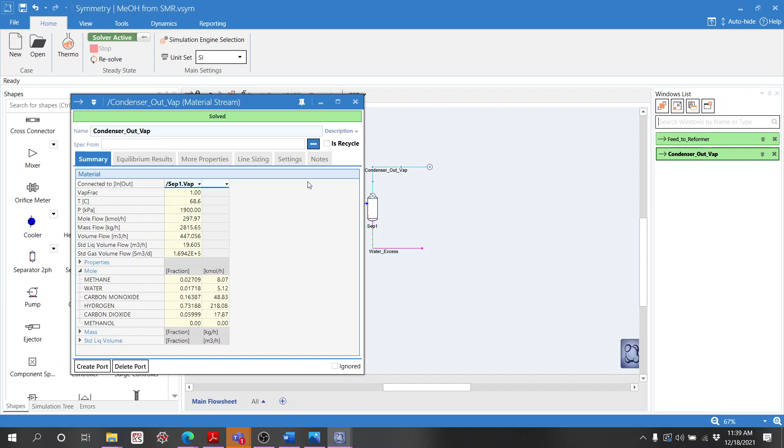Let's do it to get you understanding, because if I only say this to you, it won't get to your head. So let's do it your way. So number one, we increase the temperature, and then we increase the pressure, and then we compress it. And then the second one, we do it the other way around. So we increase the pressure, we increase the temperature. So we'll have like two alternatives, just like in this case.

So the same way, when you design a process, you have alternatives. So we'll do it your way so that you can see it yourself. Obviously, because we are going to have two alternatives, we need to copy this stream. We need to create a port and then clone it. So I have now two, this out and then another out. So now let's do it your way. We increase the temperature first to 250 degrees C.

Condenser out, the first one. Make it 250 degrees C. And then delta P is 50 kilopascal. So you have this, 250 degrees C. And then we compress it. So this is then the heater. Whatever you want. Feed to methanol one. Okay. Now we increase the temperature and then we increase the pressure. Increase the pressure is the compressor.

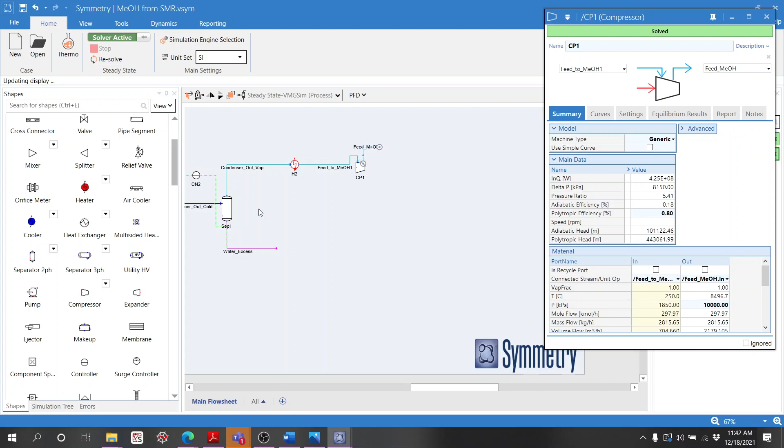Now the second option is then to increase the pressure first. Go here, and then the feed methanol 2. We feed the same information, 100 bar, right? Bar, and then the 0.8. So it's basically the same, and then cool it down. Need to copy this. This duty, and then the outlet temperature. Okay, and then we have feed to methanol 2 out, and then delta P 50.

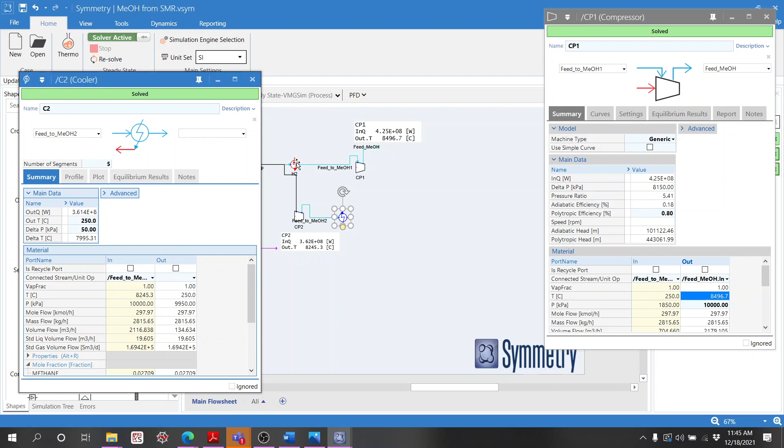This is our temperature to 250. Okay. This one I put outlet temperature here. Oh, this is not. Okay, I'll show you. So I think you know this already, but the first option is to increase the temperature from 60 to 250,

and then from this 250 we increase the pressure to 100 bar. So in doing so, we end up with 8,400 degrees C of outlet temperature over here, which is practically not possible. And having this 250 degrees C into the compressor, it will also damage. We don't have any seal that can withstand this 250 degrees C of temperature. What we have is only typically 150 degrees C. So we limit the temperature across the compressor to about 150 degrees C.

So if it goes above 150 degrees C, we'll have to reduce the outlet pressure of the pressurizing system. So the same applies in this case. In this case, we compress it first to 100 bar, and it goes to 8,200 instead of 8,400, because it starts from 60 degrees C. So having one stage of compressor like this is also problematic, because we will not be able to withstand this temperature. And having this high temperature is also not a good one.

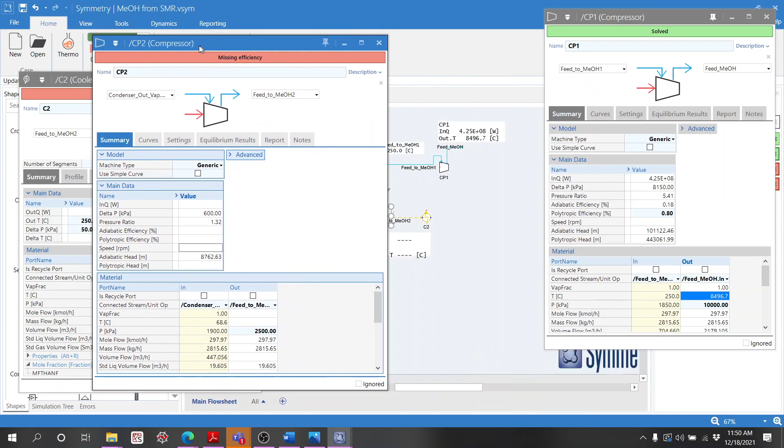So pay attention to this temperature. If it's below 150, we stop. If it's not, we keep increasing. So if we compress it from 1900 to 2500, I failed to calculate adiabatic efficiency. Okay, I don't know what happened. We're compressing it from 1900 to 2500. Let's do the other way around. Is it percentage? I'm confused with this percentage now.

So it's not point, I guess. Now I'm making a mistake. So it's a percentage. It's not 0.8%, it's 80%. Okay, so I was wrong. So let's redo the story. 100 bar. See, from 250 you compress it to 100 bar, it requires about 1 million watts. But from 60 to 100 bar, it requires about 0.6 million watts. So you save energy. That's number one.

And number two is that we need to get this temperature into the compressor lower than 150 degrees C because of mechanical reasons. So we need to get this temperature down to less than 150. 2500. You can increase it further. The pressure ratio is 1.3. You can increase it to 1.5, for example. So 3000. 3000 seems okay. 3500. 2500 is also okay. So you could stop here. It's lower than 150 degrees C.

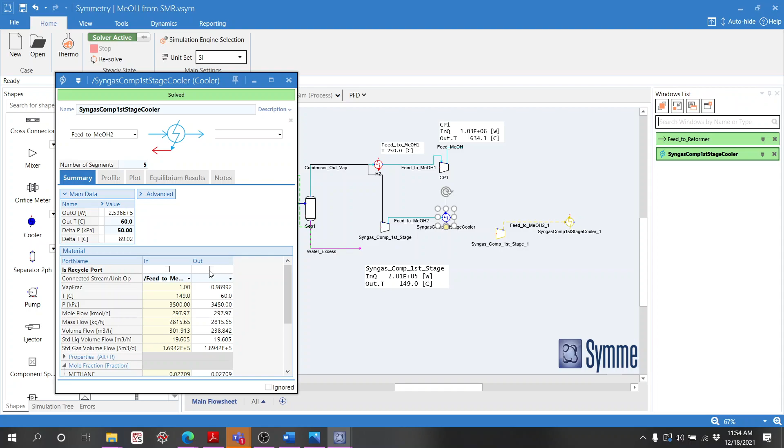So you have a cooler, and then typically, if you see this, there are some droplets here. So it's not pure vapor anymore. So we need to separate the droplets. We'll have to separate them to protect the compressor in the next stage. Oh, I haven't.

I don't know what to name it, so it's just easier to use this. Put it there.

By default, pressure drop is 0, and it's adiabatic. You can change it if you want. So in this case, we are now separating the liquid from the vapor. Put the vapor over there, and the liquid over here. The liquid is only about 50 kilograms an hour, and the vapor is 2 tons an hour.

So now we can copy the whole setup. Copy the whole setup. Okay, this one goes here.

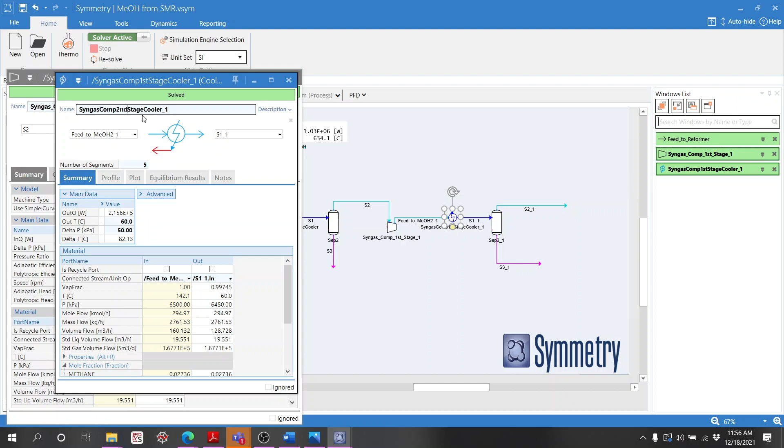So we cool it down still to 60 degrees C. This is then the second stage. This is then the first stage separator. This is then the second stage.

Almost 12, so I'm thinking to stop this at this reactor. So this is still at how much? 35 bar. This is 60 bar, 65.

So I think we'll need another stage - copy and then paste, and put it here. This is the third stage.

10 bar, 100... 100 bar. So we managed to get to 100 bar. So we cool it down back - so in this case, we're not going to cool it down, right?

So we just leave it as it is. We're not going to cool it down because we need to have the 250 degrees C. So instead of a cooler, we're not going to use this - we need to heat it up until 250 degrees C.

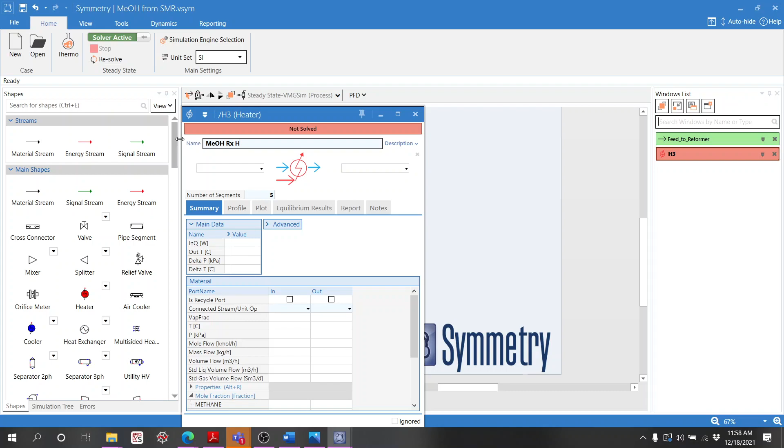This is then the methanol reactor. Reactor heater, yeah, whatever. This one, and then the outlet temperature is 250 degrees C, and delta P is 50 kPa. So it's not that number, the 100 bar. We can also increase this to 150 there, so at the end of the reactor it's about 100 bar.

So that's how we do that. At the third stage, we are not cooling it down like in the other stages - we are now heating it up because we are not sending this to another compressor, we are sending this to a reactor.

So now for the reactor, since you have no - Zahran, do you have any info on the yield and conversions, or kinetics? If you don't, then to make it easy, just use the conversion reactor again. It's better to have the kinetics, because this methanol synthesis is well known - you can easily find the kinetics. But if you don't have the kinetics with you, well, you have to find it.

But in this case, I'm not going to find it - it's 12 o'clock already, so I'm not going to force you to find another kinetics. But say, for example, I will just do this for you.

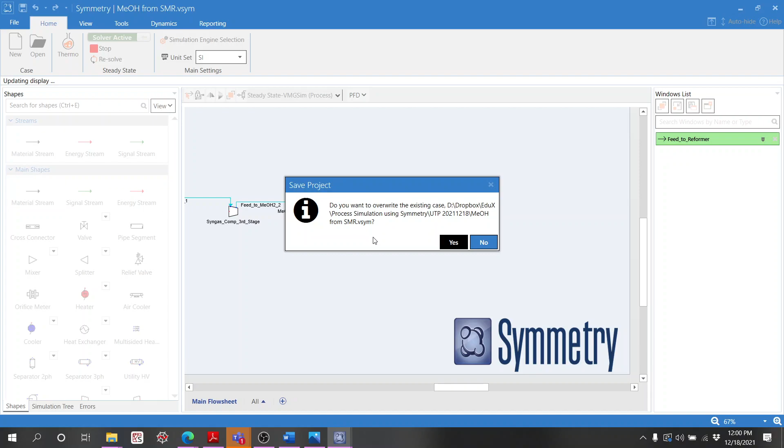Conversion efficiency isn't enough - you guys have to find this, because methanol synthesis is a well-known reaction, so you have to find it. Methanol synthesis from syngas kinetics.

I'll show you how to get the kinetics into the simulation, and then I think we can close for today and you can continue. The same way that I've been showing you how to get the information, which information to select from, and so on and so forth.

Kinetic modeling - see, kinetic modeling, sort of very easy. There's the methanol, so you can see this guy, kinetic modeling. You can find all kinds of stuff. Just take one - okay, not DME, I need to find just take this one.

100 bar, 100 bar, so we'll just use this one. Or the old one. Either of these three, so you can.

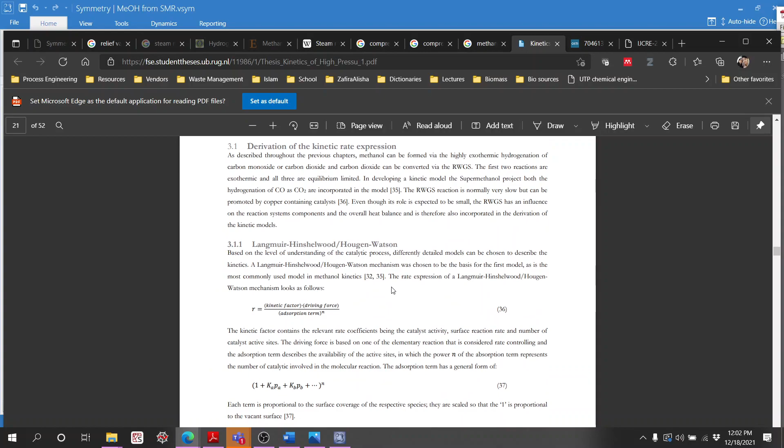See, the kinetics is so complicated, so I don't think we're going to use this. I want to find something really simple enough, because this one you can also code in Symmetry. I will show you how, but since time is limited, I want to show you a simple one - slurry reactor. Yeah, it's not a slurry reactor, it's a fixed bed reactor.

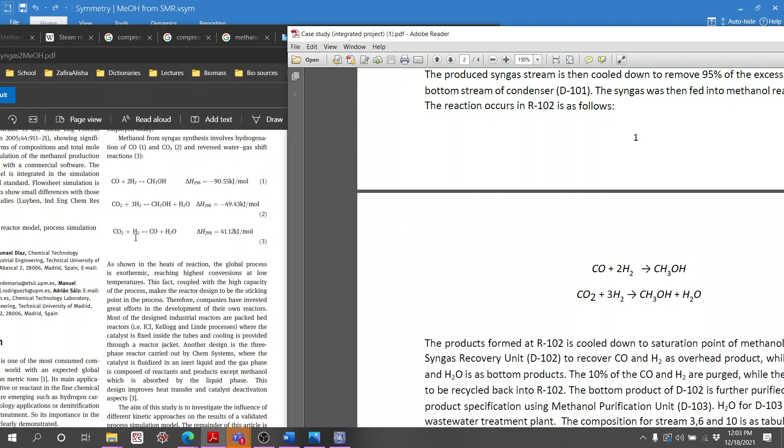Nah, so it's not it. This seems to be more like it. Right, so we have these reactions there, and then we have these reactions there. This one we don't have it, yeah, for the sake of this study.

So now, blah blah blah, so complicated. This is so complicated. So we have K, K, K, and then this K, sorry, K, and there's so many partial pressure of CO, partial pressure of hydrogen, and partial pressure of methanol, and then hydrogen.

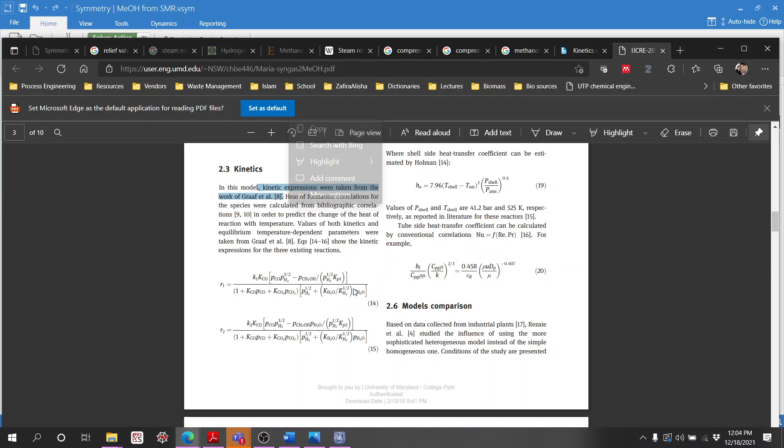Okay, where are those Ks? Didn't show. Yeah, we need to find it. Anyhow, this one, this Graaf. Graaf 8. They don't show how much these Ks are. Right.

Okay, I don't have access to this. So I don't have access to this. So anyhow, simple kinetics.

No, this one. I think you can access this, right, via your UTP account. You can access this. For me, I cannot access this. Kinetic methanol, kinetic methanol. So I think someone sent it earlier in the chat box.

Yeah, but in this case, I will show you. In this case, I need to know, because this is then K and then E. This is not fully kinetic. What the kinetics is, is that it has to show the expressions of the contributions of the hydrogen and then the CO. Can you follow? It has to be, we need to know the contributions of the CO and then hydrogen and then CO2.

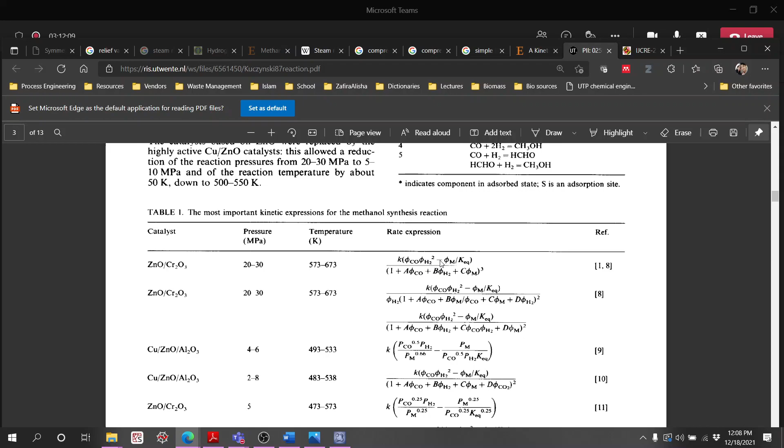Can you follow? So we don't know is this 2. Now in this case it is 2. But it could also be 1 or 3 depending on the catalytic system. So different catalytic systems, they will then require a different operating condition. They will then give us different rate expressions, because these rate expressions come from the experimental value. Yeah, they do experiments using this catalyst, using these operating conditions, and then they get the data, and then this is then the fitted kinetic data.

So I want to find at least a simple one that I can just use here. But K equilibrium, I can use this one. This one is very much simpler. K equilibrium, how much then is K equilibrium?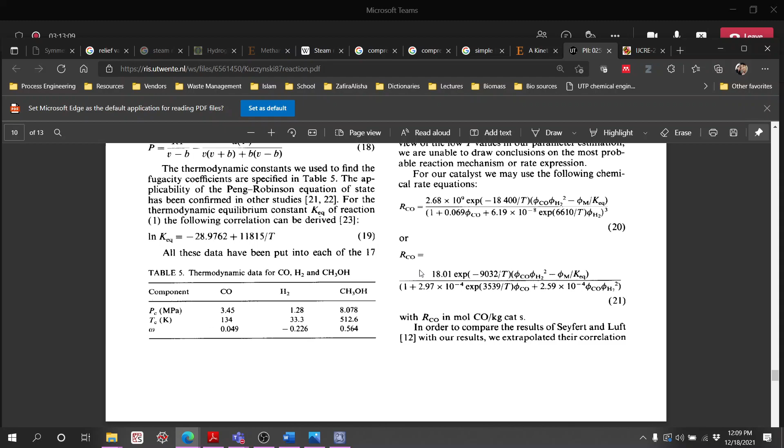Yeah, results. This one. K equilibrium is this guy.

Let's just use this here, see what happens. I'll just use these equations to calculate the K equilibrium, and then put that equilibrium. For sure, in the end you need to read this document. Yeah, you need to understand the information.

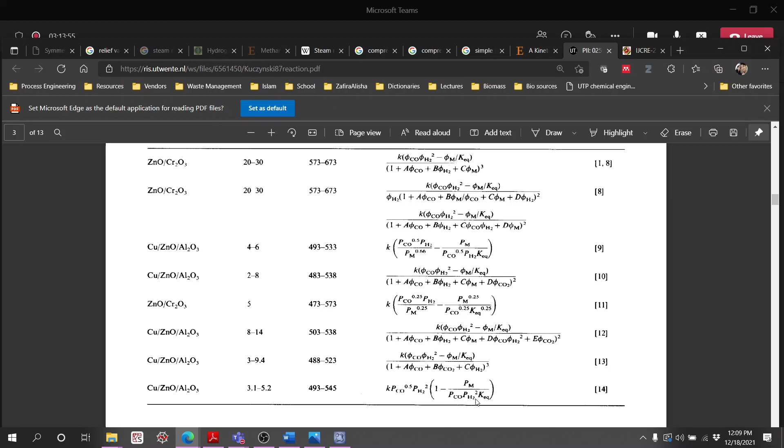But for the sake of this exercise, because it's already past 12, I'll just use this K. No, I have another K. This K, I can get this one from that equations, and then this K is coming from...

Ah, oh yeah, this is there. This is it. Let's see the easiest one. I think this one, yeah. This one is the easiest one.

So you can redo that later with more complicated stuff, but I will show you the easiest one so that you understand. So K, this K is this K, and then K0. So this K is a function of K0, and then this E and R. And then K equilibrium, we have the K equilibrium somewhere up there. Okay, so I will use this. I'll put it to the side.

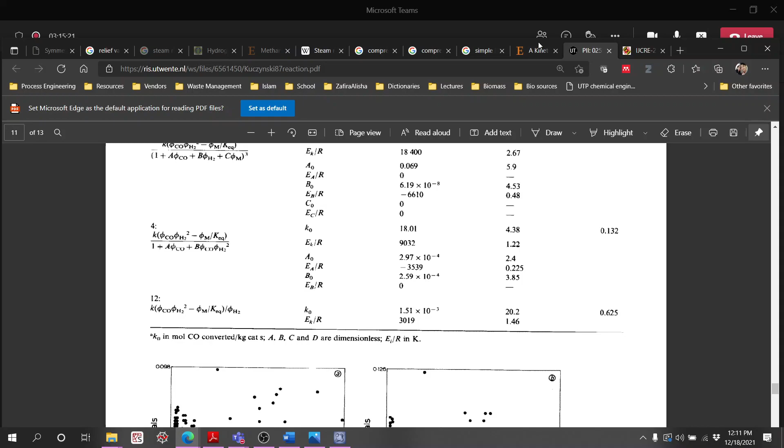But this is only for CO and hydrogen. Oh, that means this is only for this reaction here. It's only for this reaction. So you need to find another one for this one as well. Okay, so for the sake of this exercise, I will just model this one for you and show you how to use this information, and then later on you can expand this.

Yeah, later on you can expand this, and you have to expand this. I'll put this aside. Open another one. Oh, this is the one that I've seen, I guess.

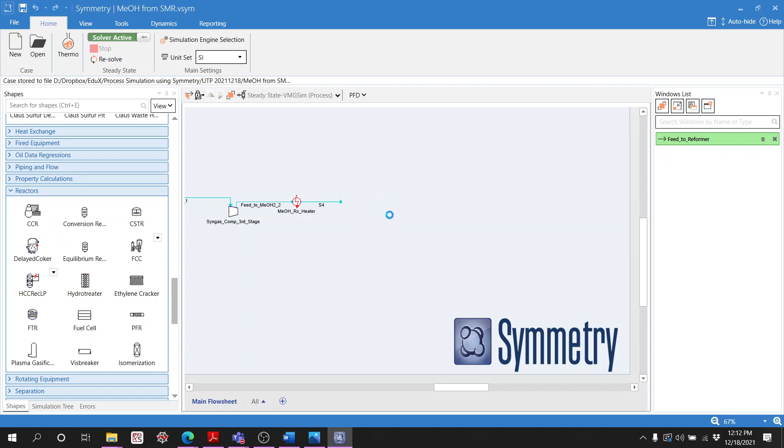Yeah, we have seen this, so we will use this. Goes to... where's my reactor? Plug flow reactor, because we have the kinetics.

This one, and then this methanol reactor. Okay, now since we only have one kinetics, we only know one kinetics, so we will only use the first one, CO plus the first one, this one.

You need to find the other one. Copy add, base component is, I don't know, CO. CO is -1, hydrogen -2, or methanol is 1. Methanol is 1. Okay.

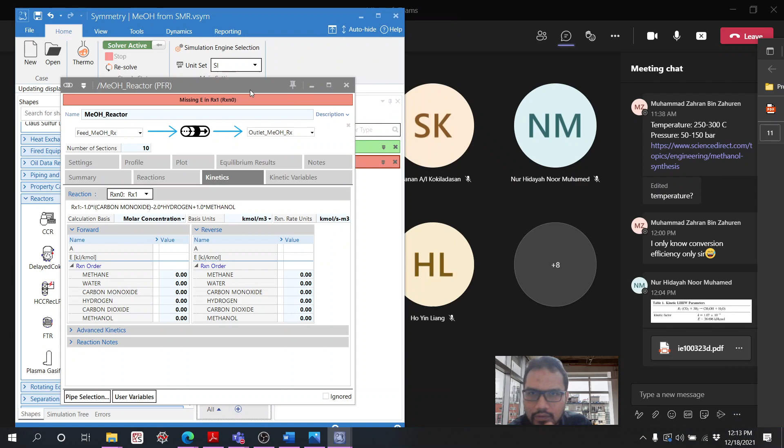And then kinetics. Now kinetics... just use this for the sake of this exercise. You need to find a better one, maybe, or a simpler one. Okay, now so we have E, molar concentration. So reaction kinetics, in this reaction kinetics, the...

Okay, so the default here is you have the forward reactions E, and then there is also the reversible reactions over here. So this is the forward kinetic, and then it's the reversible kinetics. So here, because we specify it to be molar concentration, that means everything is then the molar concentrations of this guy.

In this case, so reaction order. So CO is then 1, hydrogen is 2, and then methanol is the -1, and then there's hydrogen as well, divided by this is also 1. So this expression is not the simple expression that we get over here. So I think this is more like partial pressure, I guess.

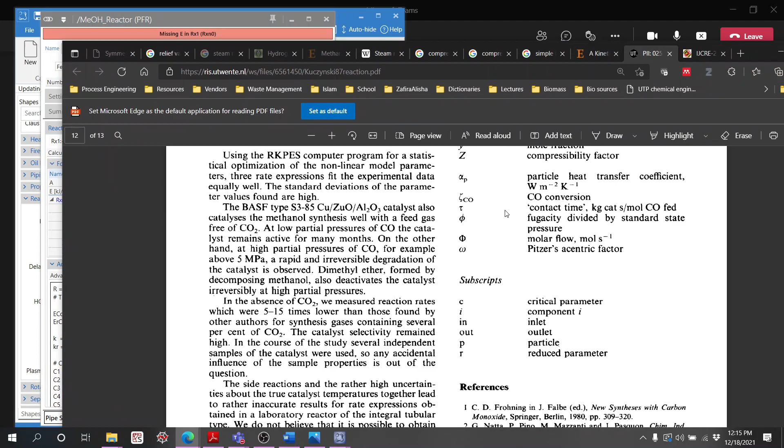Yeah, so let me see. This is then a partial pressure. So that means we have to... hey, what is that stuff? So we have to do advanced kinetic.

And then this one is molar concentrations, this is partial pressure. It's in kilopascal, yeah, I don't know. This is kilopascal, and then advanced kinetic. I think so, in this advanced kinetic you can edit them, yeah. See, partial pressure, and it's automatically edited.

This, we don't have any reverse reactions in this case, so you can just put this 0. This is also 0, yeah. So everything here will be 0, and then the reaction is then the... in this case we have...

K, oh, A is then the A. So this A is then this K, A0 is then this one. So the unit, be careful on the unit, yeah. So in this case, just for the sake of keying the information, 1.51 E minus 3, and then this is kilojoule per kilomole.

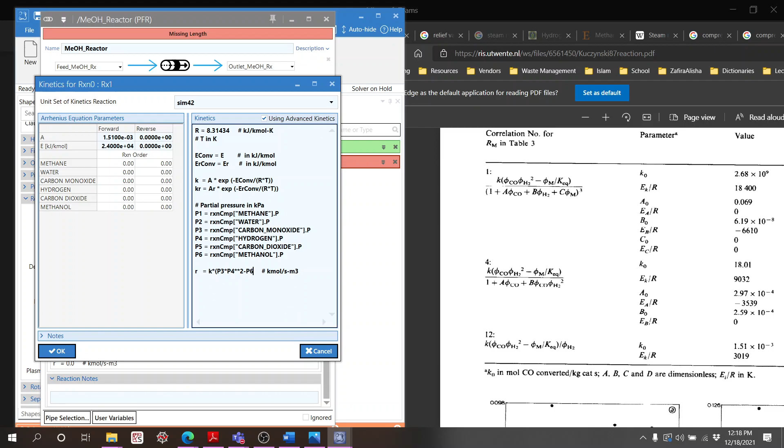CO is P3. So P3 to the power of, no, not to the power, it's only one. And then hydrogen is P4, 2, right? And then minus partial of methanol, P6, divided by, that's the K equilibrium.

So this K equilibrium is, where is that stuff? This one. So K equilibrium is then exponent divided by exponent. I don't know if exponent is there, but we'll see. Exponent minus 9762 plus 11815 divided by temperature in Kelvin, and then close.

And then divided by, the whole thing is divided by this, open and then close and then close again, and divided by the P hydrogen, P4. Yeah, so that should be okay, yeah.

Notes, and then okay, yeah. Okay, so these are the equations, we'll see what happens, yeah, because this is also my first time having quite complicated, not quite complicated, but...

Okay, so we have now this, and then it says missing length, so we need to know what the size of the reactor is. So there's, I don't know, maybe 5 meters or something, and then diameter is I don't know.

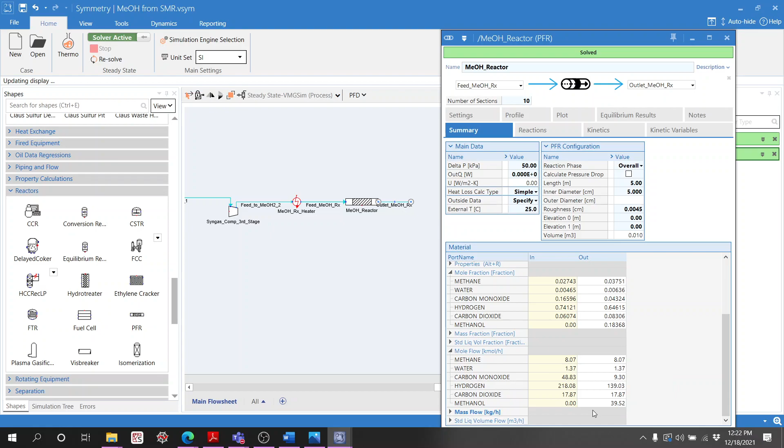So methane is constant because it's not reacting. Water is also not reacting. We are going to make methanol, so methanol is produced. CO2 is not doing anything because we only use the first reaction here: methanol, CO, and hydrogen. So these three components should change. Methanol is being produced, CO is reduced, and hydrogen is also reduced.

So now I've shown you how to apply kinetics you get from your experiments or from others' experiments, and then getting this number. I don't know if this number is correct; you have to find it. It works, but the numbers may not be correct.

So depending on the units we get from papers or any source of information, we need to make sure we get the correct number, the correct unit. And in this one, coincidentally, the results seem to be logical.

You can also see we still have some carbon monoxide, so if you reduce it to 2.5, for example, see how much that was. This is the result for 2.5. You could also do a sensitivity analysis, like a case study. So I put this 2.5 and then this 5, and then I compare it.

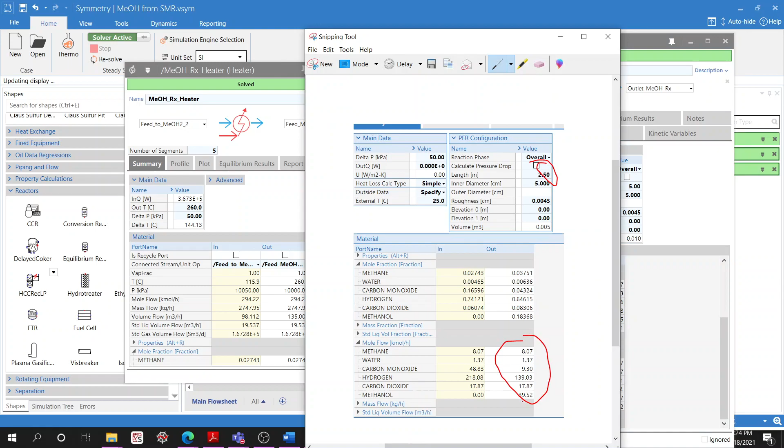What we could also do is increase the temperature, for example 260 degrees C. See what happens. We see methanol 39.52, and then you increase the temperature, and it drops. 250 was the original one. So it's something that you can play around with.

So I think I've shown you quite a number of things on how to use the simulator, at least the basics, up to the selection of the reactor and how to input advanced kinetics into the system. Always make sure you get the units correct in the kinetics. This one may not be entirely correct, so for your exercise, you could also search textbooks for the kinetics of methanol synthesis, because then you can learn a lot.

I've been saying to you right from the beginning that you have to be able to answer all of my questions. All of these questions are information required to make the simulation correct, to make the model of this plant correct. Because once we get this model correct, the result will be more representative.

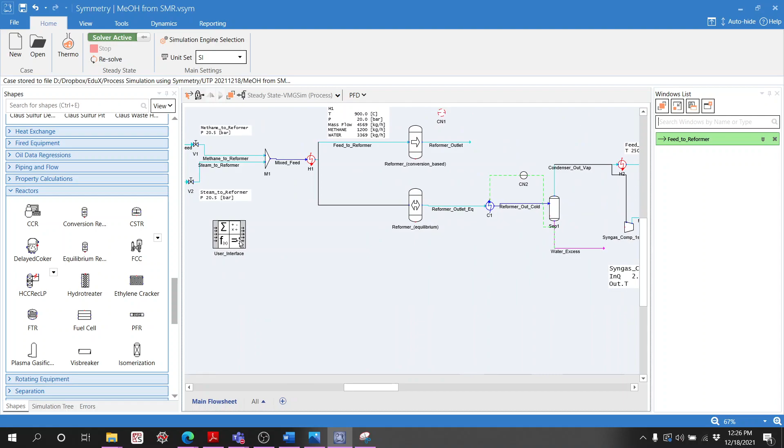You could get this temperature into the process calculator. Yeah. So you have all informations in here.

Hello, hello, hello. Are you guys all gone already? Hello. I can only imagine how frustrating your lecturer would be, teaching you online class. There's, you're laggy, huh? Can I hear? Say it again, Zahran, because your voice is breaking up. Hello, hello. I don't know. I think I cannot hear you clearly. You cannot hear me clearly. For me lah, for me. And then why did you not say so right from the beginning? Because right from the beginning, I asked already, can you hear me clearly? And some of you said yes. Just now is yes, but I cannot hear what you're trying to ask just now.

So I was trying to ask now: can you follow this? That's number one. Do you understand what I've been doing? That's number two. And then can you work it out further, because up until now we are here. Yeah. We haven't got to this part of recycle, but we can have another session later on. But in this case, up until here, can you then move forward? We will try. Yeah, very good. If not, then let me know.

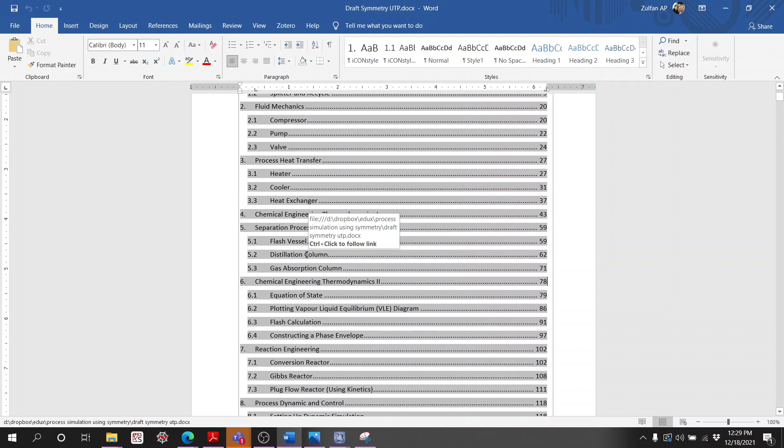Again, I'm not really sure how much you can gain in half an hour or even 1 or 2 days. But nonetheless, I've showed you where to look for the information here in Symmetry. You can find in the simulations over here in this help file, and I've shared with Shahira and Winnie on this part, which you can then follow. I think the kinetics is here. See, distillation column is there. I think you will need to use this later on, flash vessel distillation columns. And then the plug flow using kinetics is also there, so you can redo this and then use the different one.

The rest is, what else? I've showed you how to use controller. I've showed you how to use a case study. But for optimizer, maybe it's a later occasion. Do you have any questions? So if you don't have any questions, then what can I say? Any questions? Do you understand this? How much do you understand? Well, very difficult questions. Okay. Anyhow,

have you tried? What matters in this modeling and simulation is not the tools. What matters is your logic on the process, your understanding on the process. That is what matters. It's not about the tools. It's not about this Symmetry or HYSYS or Aspen Plus or Pro/II or whatnot. So your understanding on the process is what matters. I've been asking you many times already what to do, what are the operating conditions. If you don't have all of this information, nobody will be able to help you. Okay? Okay or no?